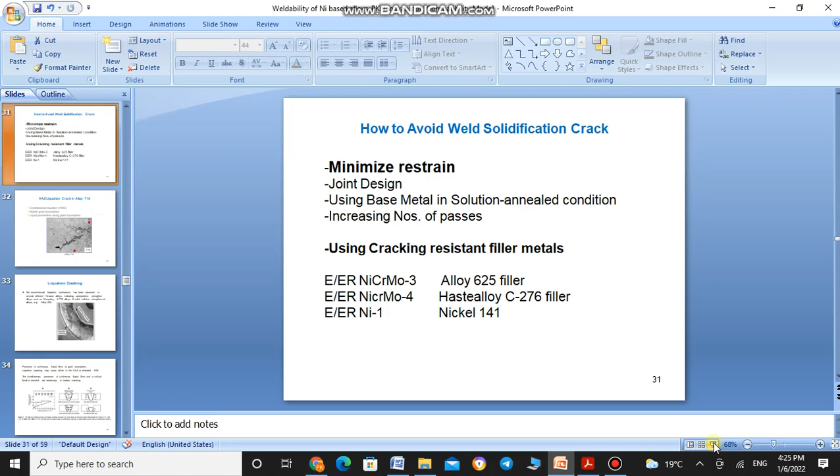Hello, viewers. Welcome back to part 5 of the lecture series on weldability of nickel based alloys.

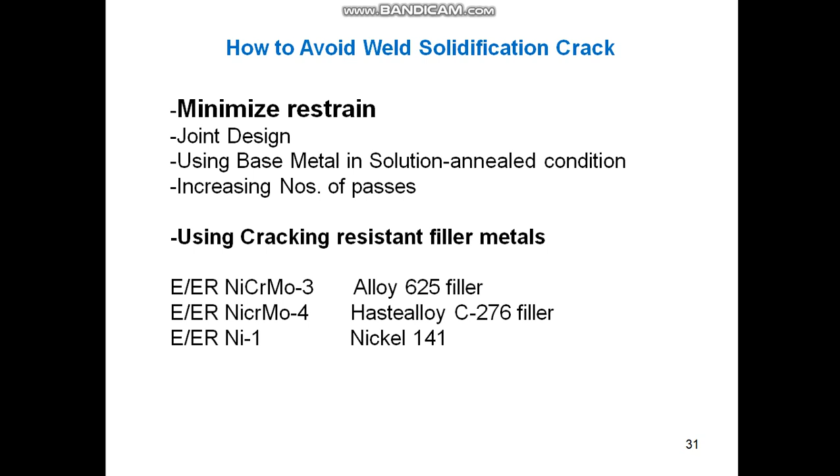During our last lecture, part 4, we discussed two strategies to minimize, rather to avoid, weld solidification cracking, and we partially discussed the liquation cracking phenomena. That's because of constitutional liquation due to niobium carbide formation. The liquid penetrates through the grain boundary, and under the restraint condition, the grains separate out. Most of that is found in alloy 718.

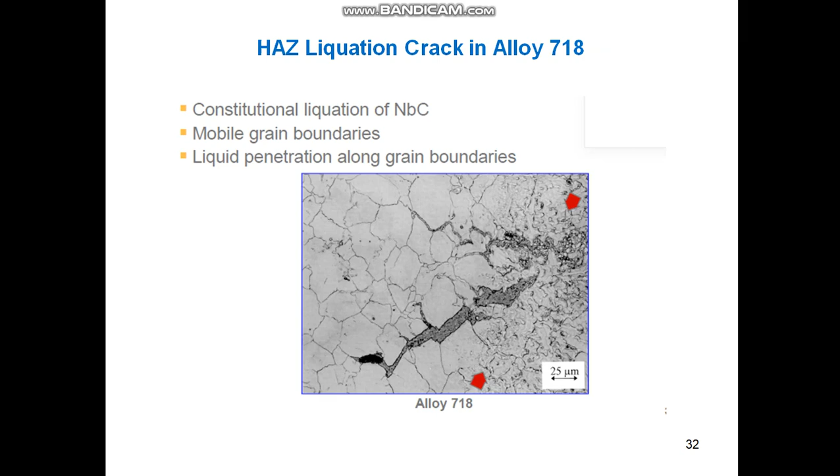This is another example of liquation cracking, most of the time found in precipitation strengthened alloys, Waspaloy and 718 alloys, and solution strengthened alloys like alloy 625. And liquation cracking, this is the constitutional liquation phenomena. You would see a crack on the heat affected zone side.